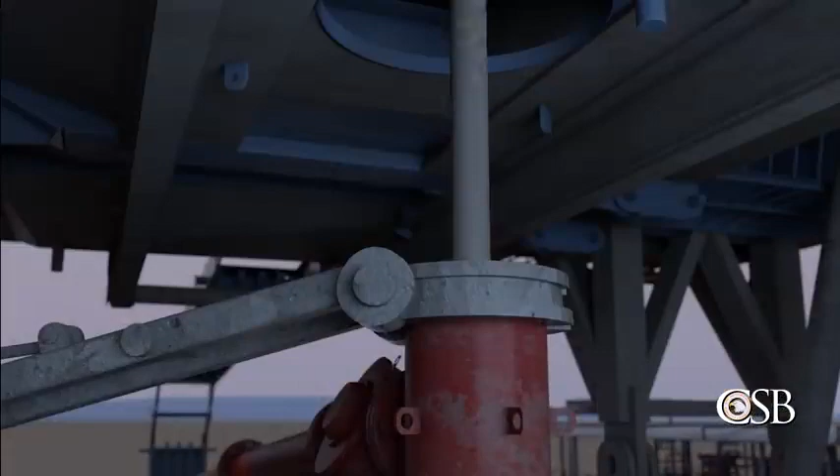January 22, 2018, the Pryor Trust gas well in Pittsburg County, Oklahoma. The well was operated by Red Mountain Operating, LLC, which contracted the Patterson-UTI Drilling Company to drill the well. In order to change a drill bit, crew members removed the drill pipe from the well. Approximately 3.5 hours later, a blowout and rig fire occurred, killing 5 workers.

Industry best practices recommend having 2 protective barriers in place at all times during drilling operations. But our investigation into the incident at the Pryor Trust well found that both of those barriers failed. The safety management system utilized at the well was simply not effective, and the result was a catastrophic blowout and fire.

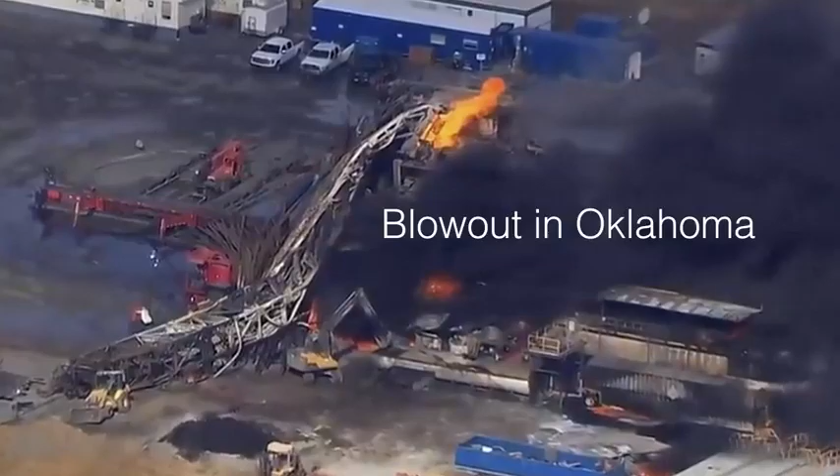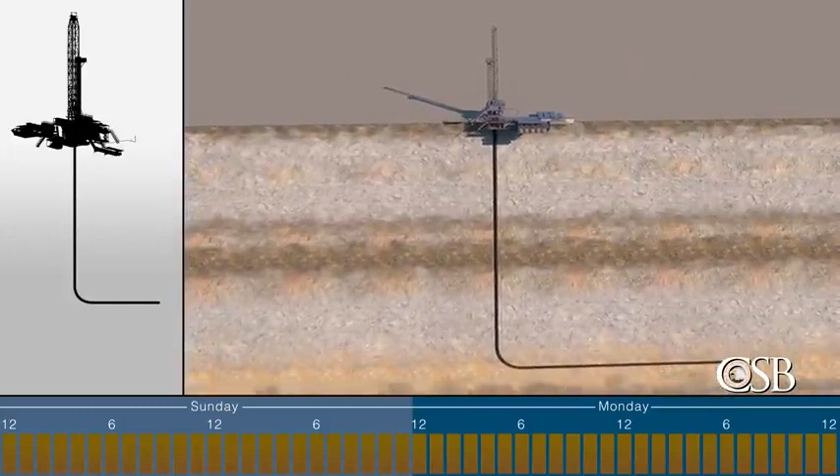The Pryor Trust gas well was comprised of vertical and horizontal sections being drilled to reach underground natural gas in the Woodford Geological Formation. During drilling, a diesel oil-based liquid called mud is pumped down through the drill pipe and back up through the area of the well outside of the drill pipe, called the annulus.

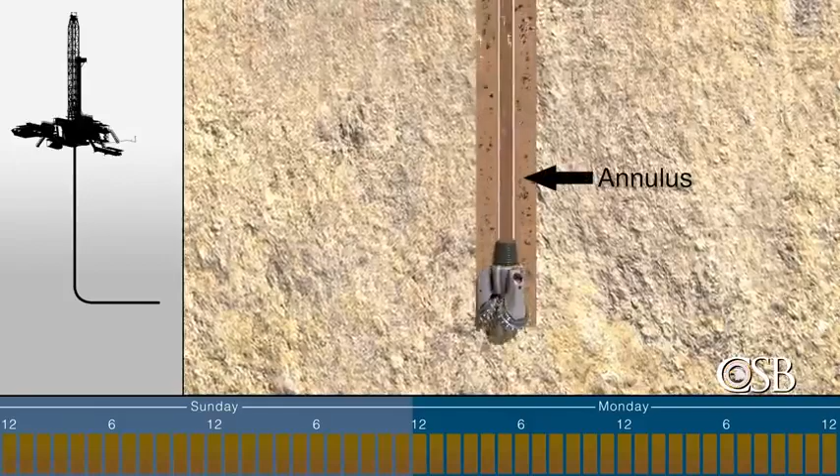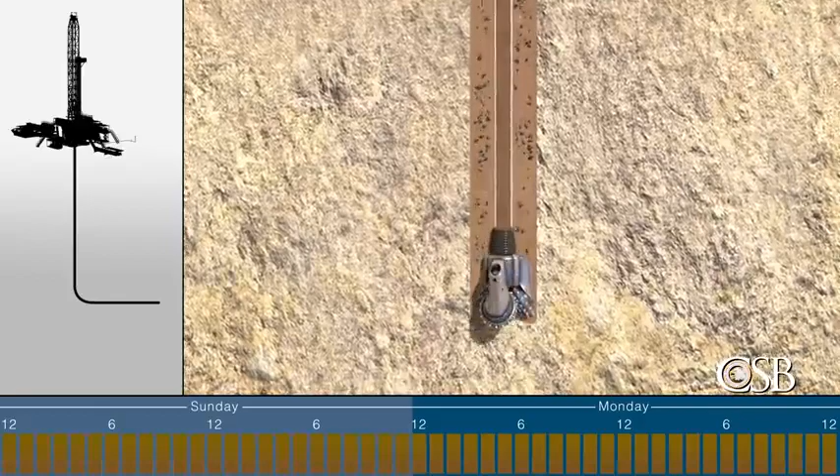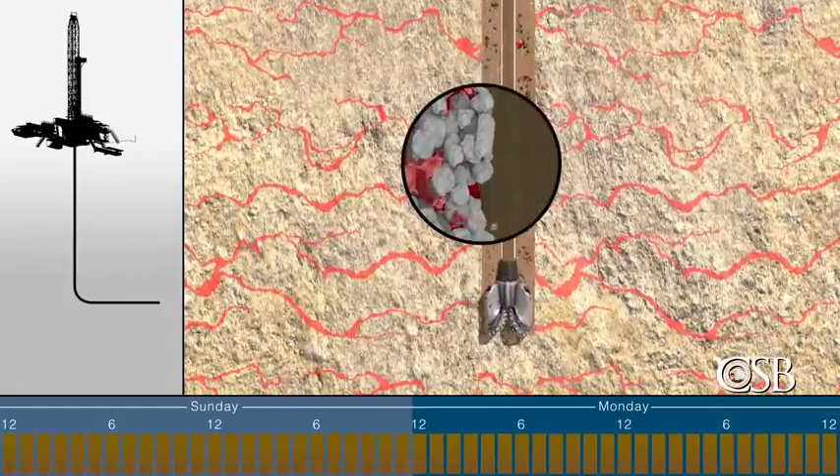When mud returns to the surface, it includes rock cuttings from the bottom of the well. Mud, however, has another important function. It is designed to add pressure to the well so that gas within the exposed geological formation is unable to enter the well during drilling. If that happens, and the gas is not detected, it can lead to a dangerous blowout.

On January 21, 2018, Patterson crew members had been drilling the well for 10 days under the supervision of 2 contracted representatives from Red Mountain. They were drilling the horizontal section of the well.

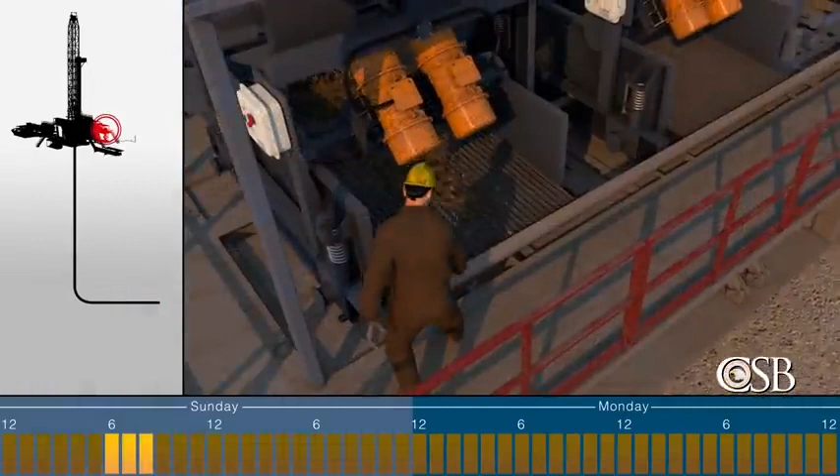That morning, a crew member called a mud logger studied the rocks returning to the surface and found they were different than expected. He believed the drill pipe had inadvertently entered a different geological formation where Red Mountain did not intend to drill. Shortly after, gas started to escape from mud returning to the surface.

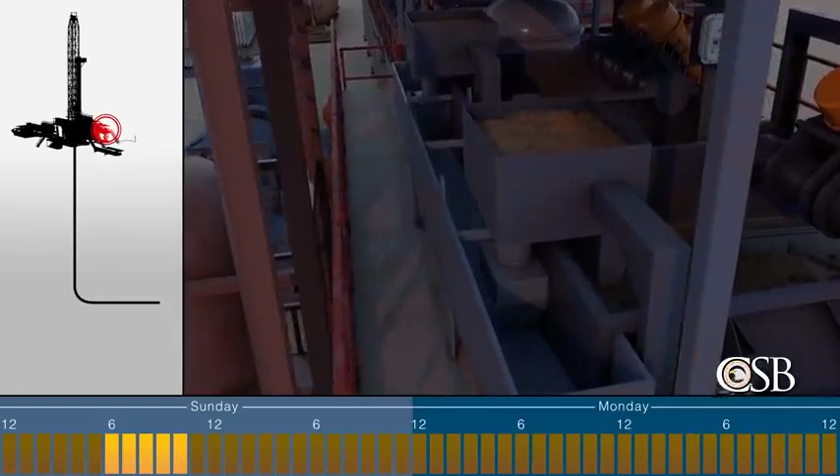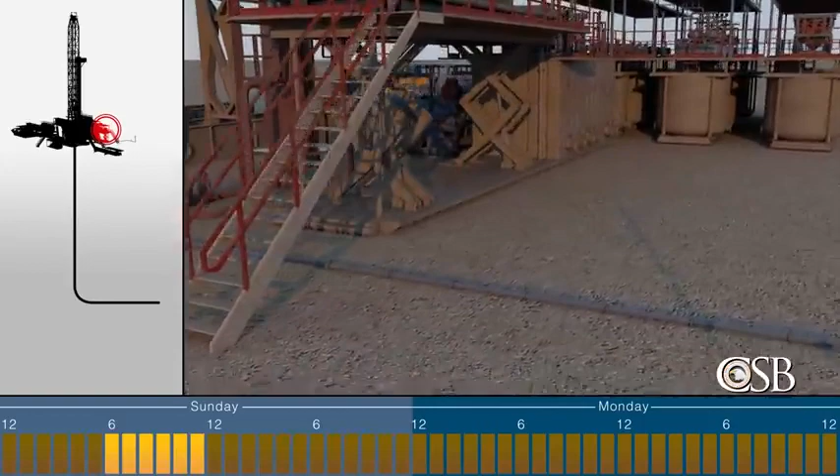The gas caused mud to spit out of equipment near the well and cover a portion of the rig. Around 11 a.m., the drilling crew adjusted piping so that mud returning from the well was routed to a piece of equipment called a mud gas separator that removed the gas from the mud. The separated gas was then routed to a flare to safely burn it.

The size of the flare indicated that there was a significant amount of gas in the mud and that the well had likely become underbalanced, meaning that pressure from the mud was not keeping gas out of the well as intended. The crew continued drilling underbalanced until 3:30 p.m., when they stopped because the drill bit had become worn and needed to be replaced.

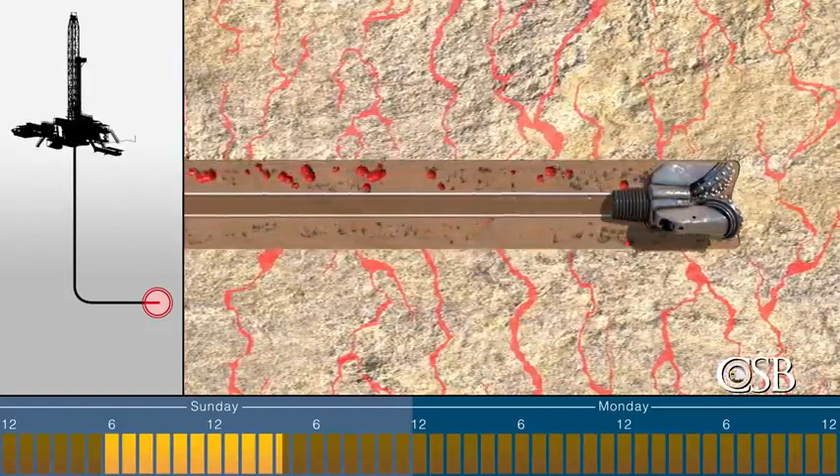The crew first circulated the well for 3 hours by pumping mud down the drill pipe and up the annulus. The flare continued while the well was circulating, an indication that the well remained underbalanced. While circulating, the Red Mountain representatives discussed how to remove the drill pipe from the well in order to replace the drill bit. The process to remove a drill pipe is called tripping.

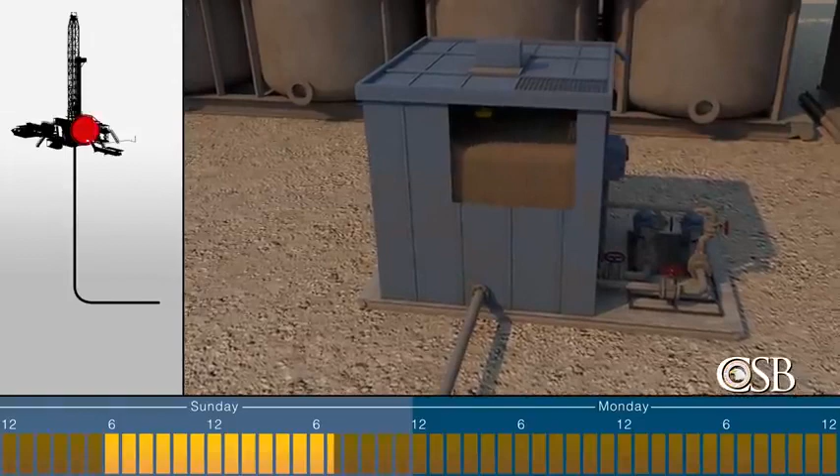During any tripping operation, mud is pumped into the well to replace the volume of drill pipe being removed, which prevents gas from flowing into the well. In this case, the Red Mountain representatives decided to use a tripping method called calculated fill, which involved periodically pumping a calculated amount of mud into the well as the drill pipe was removed. They believed this method would keep the well contained if gas entered during the operation.

But it was not a standard tripping method during normal drilling, so no one on the Patterson crew had performed it before, and they had no written procedure. The crew started removing the drill pipe at 6:47 p.m.

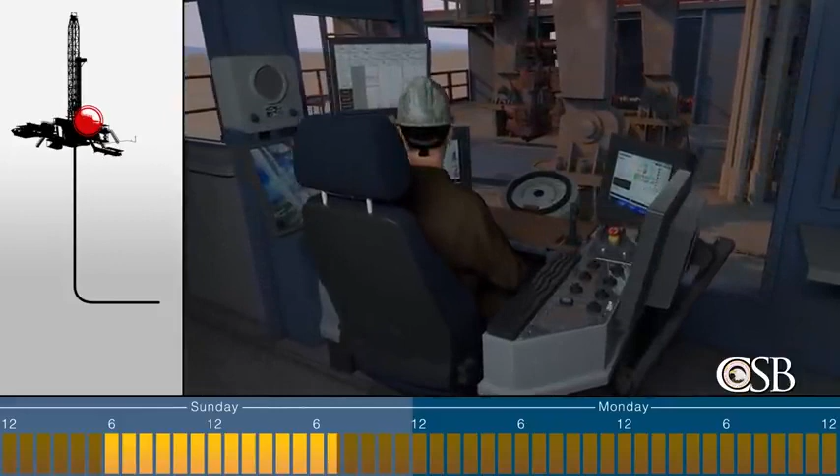The CSB found that while tripping the drill pipe from the horizontal section of the well, not enough mud was pumped and gas entered the well. The driller, who was controlling the operation from inside a building on the rig called the driller's cabin, did not see the discrepancy. That is because he had not been sufficiently trained on a new electronic version of a trip sheet, which is a form used to monitor and calculate whether a well is taking the proper amount of mud during tripping.

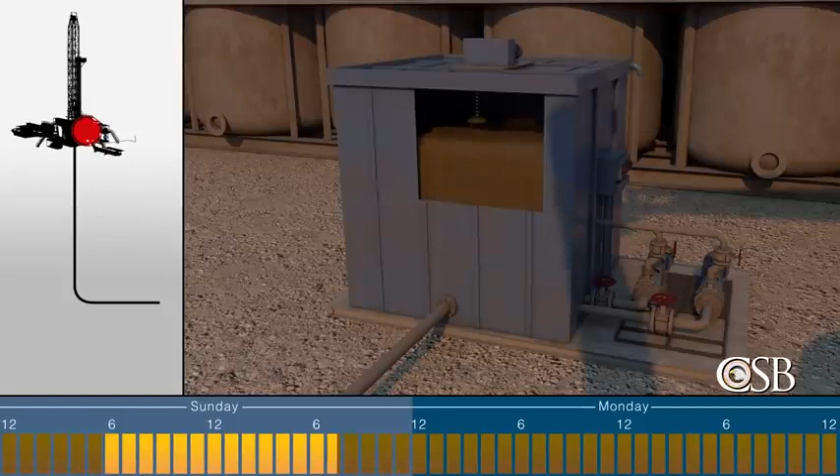As a result, he was unable to see that a significant amount of gas continued to enter or expand within the well, causing pressure to increase and mud to backflow into a surface tank called the trip tank. In fact, pressure at the surface had increased so much that the centrifugal pump the crew was using could no longer pump mud against the well's pressure. Red Mountain's representatives decided to switch to higher pressure mud pumps to try to force mud into the well, believing the pressure applied would push any gas out.

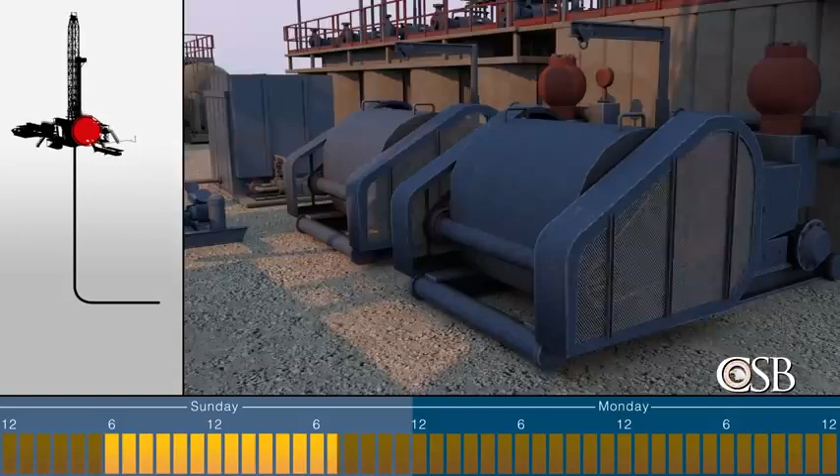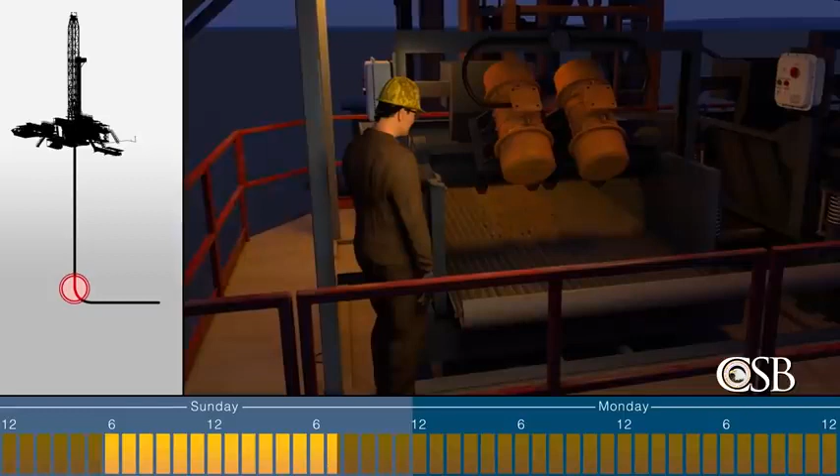But by the time the drill bit reached the top of the curve in the well, the CSB found that, unknown to drilling crew members, 20 barrels of gas had entered or expanded within the well. At that time, the drilling crew performed a 45-second flow check to see if gas was flowing in the well. The crew did not observe any flow and believed the well to be stable, but the CSB determined that the flow check was inadequate.

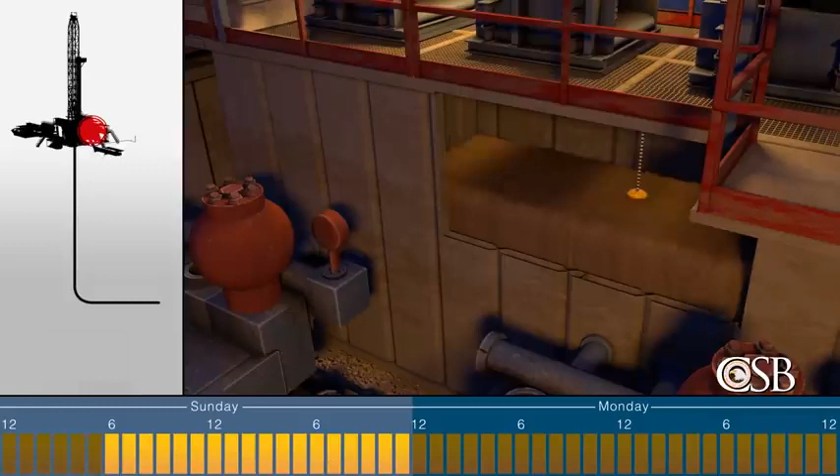At 11 p.m., the drilling crew again circulated the well. While circulating, the rig's mud pits, tanks used to hold mud at the surface and equipped with level sensors, gained 14 barrels of mud when they should have remained stable. This meant the well had gained approximately 14 barrels of gas, which caused mud to escape at the surface. But the night shift driller had turned off the alarm system before the tripping operation, so no alarm sounded and the large gain went unnoticed.

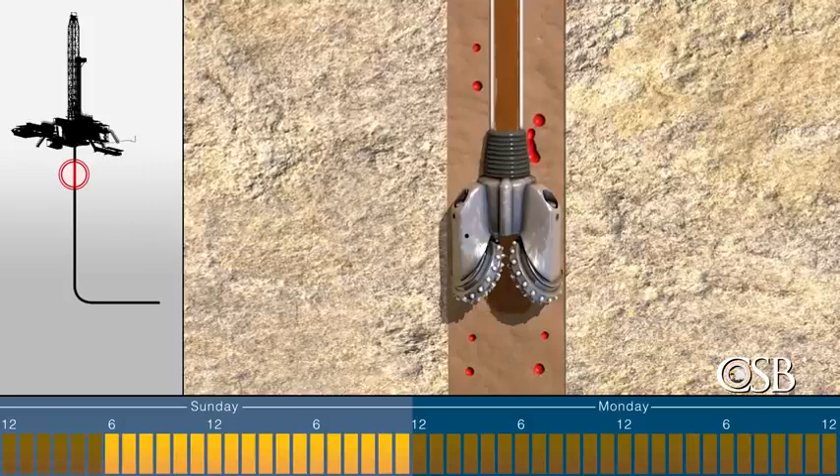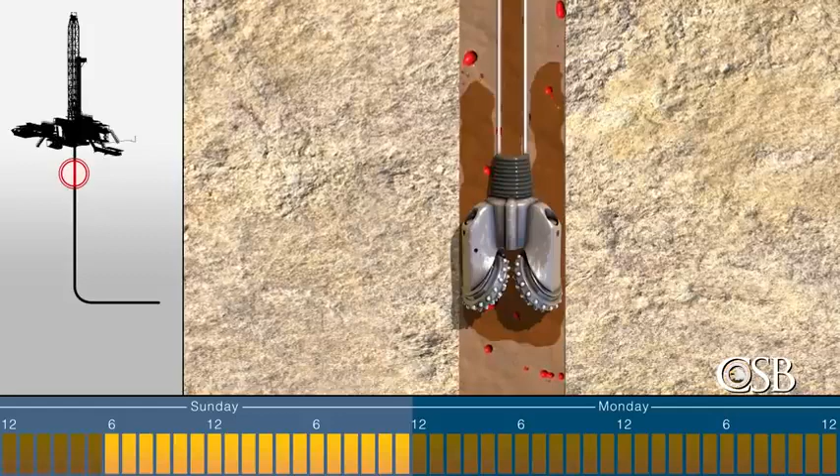Red Mountain's representatives then decided to pump a weighted volume of mud, called a pill, into the well to generate enough pressure to prevent gas from entering. But a Patterson drilling crew member misheard Red Mountain's instructions over the radio, and they accidentally added lost circulation material to the pill. This material is designed to clog breaches in the well and is not intended to be in weighted pills. Although the mistake was discovered, the pill containing the lost circulation material was pumped down to the bottom of the drill pipe, clogging it.

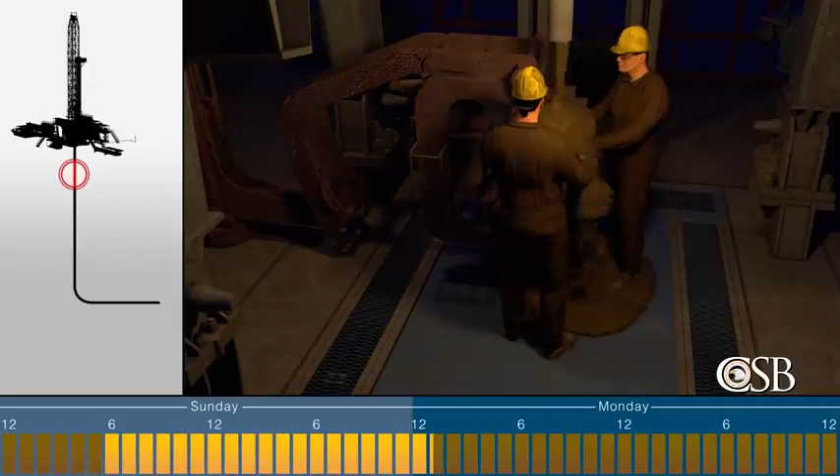By 1:12 a.m. on January 22nd, the crew started to remove the drill pipe from the vertical section of the well, using the typical industry tripping method called continuous fill, where mud is pumped continuously into the well as the drill pipe is removed. But because the drill pipe was clogged, the mud was not freely draining into the well. The crew attempted to pump a weighted slug of mud into the drill pipe to push the clogged mud out, but this was not successful.

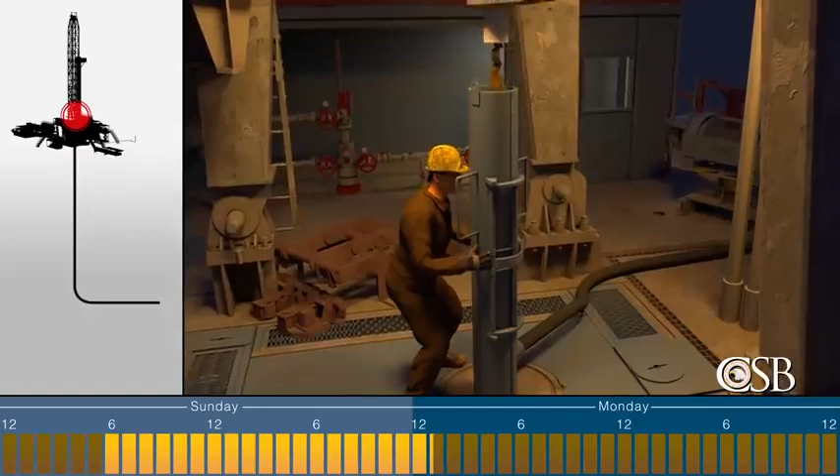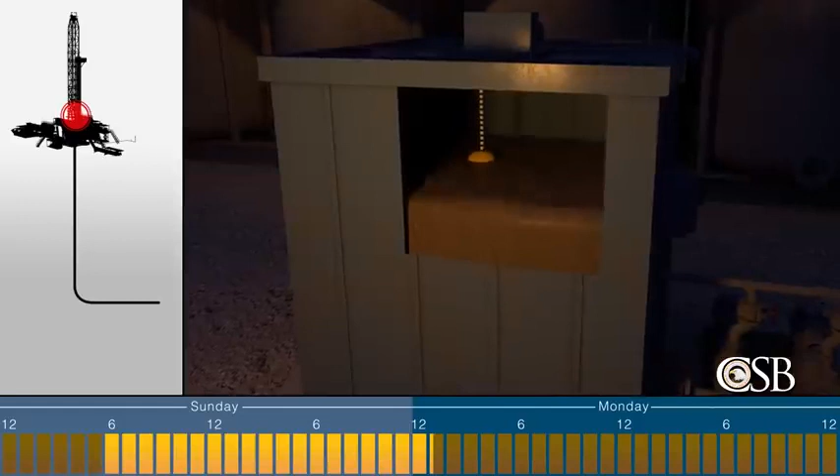With the drill pipe plugged, the drilling crew had to trip wet, meaning mud was in the pipe sections being removed at the surface. The crew used a mud bucket to collect mud from the drill pipe, draining it into the trip tank. But the trip tank was also used to pump mud into the well during tripping, so its volume started to fluctuate as mud was pumped out and drained in. The fluctuations confused crew members, who did not realize that while the drill pipe was being removed from the vertical section, the well gained another 23 barrels of gas.

When the bottom hole assembly, the equipment at the end of the drill pipe that includes the drill bit, was near the top of the well, the crew finally removed the plugged part of the drill pipe. For the next hour, they tried to clear the clog. But at that time, and during a subsequent shift change, the well was still flowing, gaining another 31 barrels of gas and pushing more mud into the trip tank. No one saw the gain.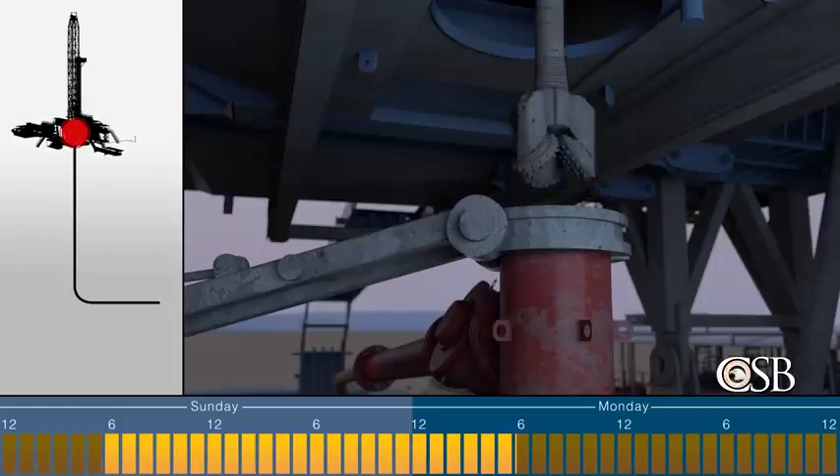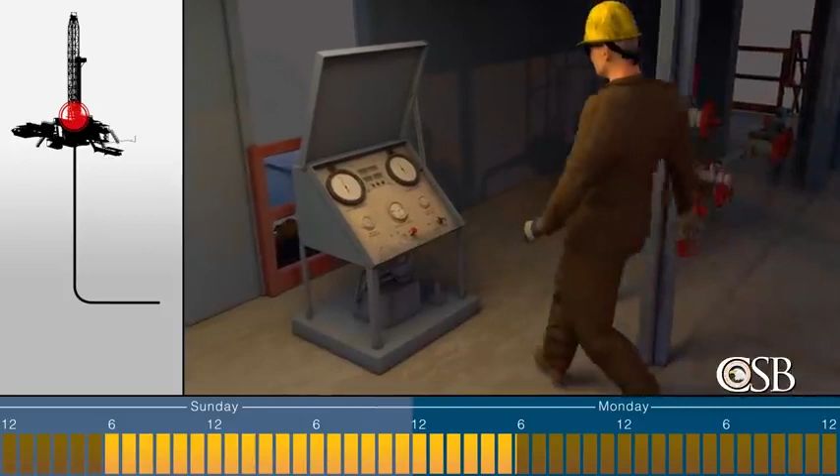At 6:10 a.m., the crew lifted the bottom hole assembly out of the well and closed the blind rams on the blowout preventer. They prepared a new bottom hole assembly for testing. When it was ready, a drilling crew member checked a pressure gauge on the rig floor to see if it showed pressure in the well, a safety precaution used before opening the blowout preventer. The pressure gauge showed no pressure.

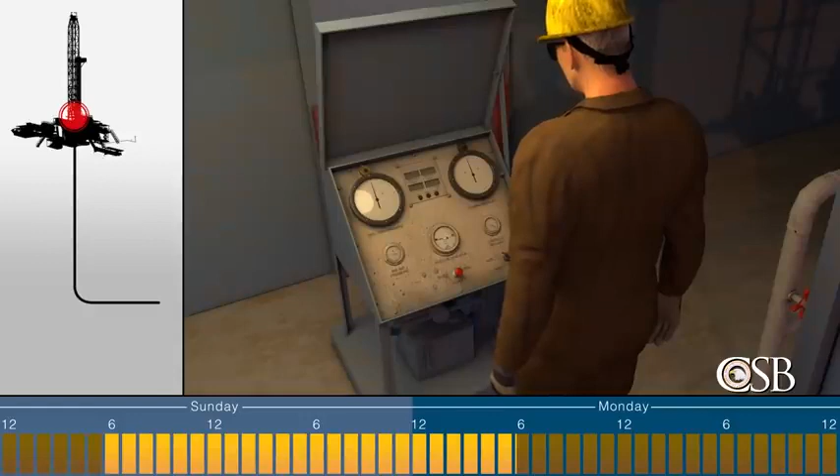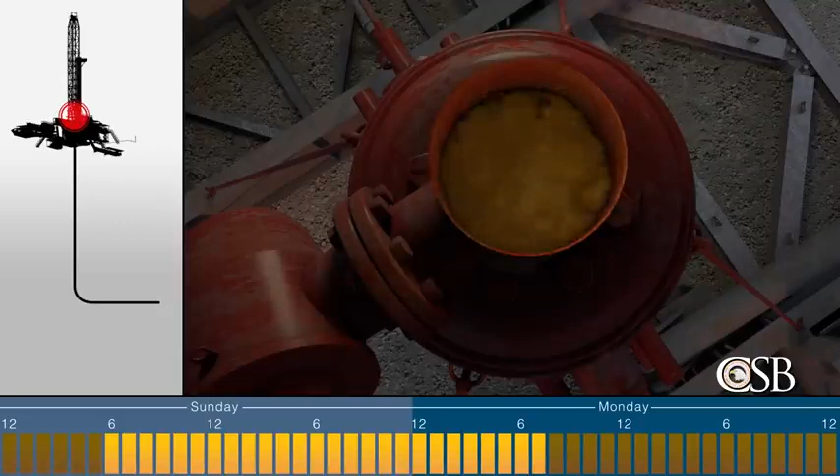But at 7:57 a.m., when the blind rams were reopened so the new bottom hole assembly could be lowered into the well, 5 barrels of mud surged to the mud pits. At that time, a crew member pulled away the steel plate covering the hole in the rig floor over the well. He waved over another worker who saw mud bubbling in the well, a sign that there was a significant amount of gas in the mud. That worker later told the CSB that he does not know if the mud bubbling was communicated to the driller.

Between 7:57 a.m. and 8:35 a.m., while the drilling crew was testing the new bottom hole assembly, the mud pits gained another 102 barrels of mud, a very large volume. This significant gain likely displayed on the driller's data screen, but the day shift driller also chose to turn off the alarm system, and it is unknown if the driller saw this dangerous gain.

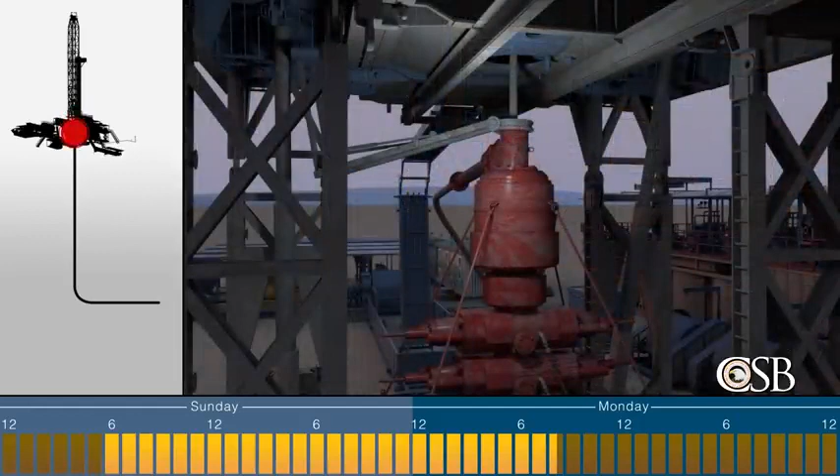At 8:35, with testing complete, the bottom hole assembly was removed from the well, and the mud pits gained another 12 barrels of mud, for a total influx of 207 barrels of gas into the well from the start of the tripping operation. A crew member saw mud flowing up out of the open blowout preventer stack.

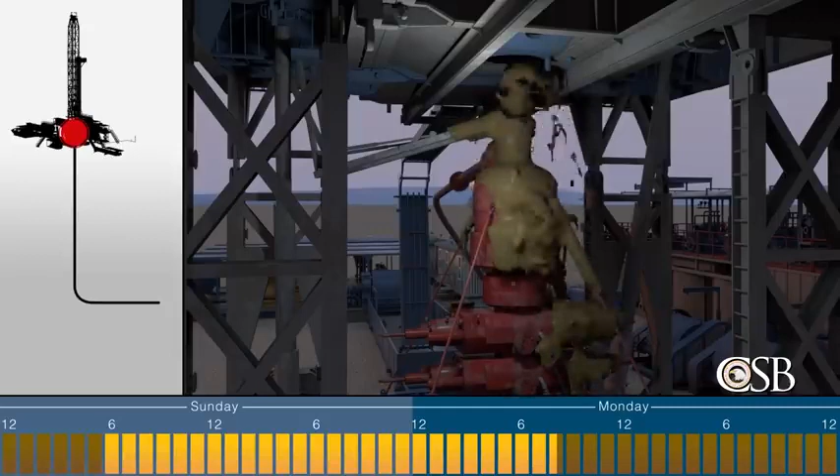The mud was shooting up steadily, getting closer to the rig floor. The crew member told the driller, and the driller responded that he was going to close the blind rams, but he never made it. Seconds later, mud blew upwards out of the well in what is known as a blowout.

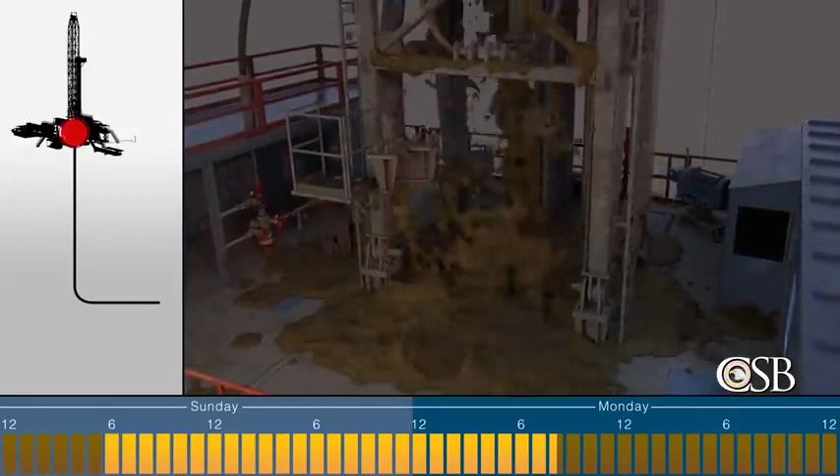2 workers on the rig floor ran into the driller's cabin, where 3 other workers were already located. The gas and mud then ignited, causing a massive fire. All 5 people in the driller's cabin were killed.

The blowout continued for hours until a well control services company was able to shut in the well around 4 p.m.

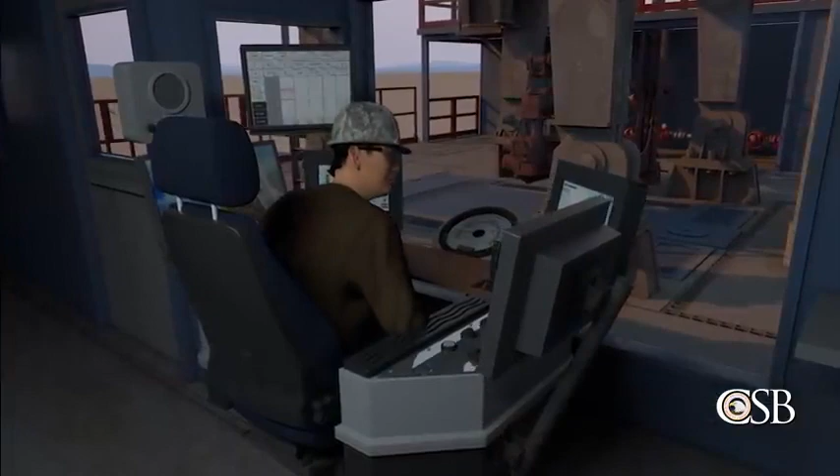During its investigation, the CSB found data indicating that on the evening prior to the blowout, the night shift driller turned off the entire alarm system. Data also indicates that the day shift driller briefly turned on the alarm system, but then quickly turned it off again on the day of the incident. Other than that short period, the alarm system was off for 14 hours, leading to the blowout.

We were not able to conclusively determine why the drillers turned the alarm system off. A possible reason is that the alarms were perceived as a nuisance or an annoyance. In fact, we found that had the alarm system been on, most of the alarms that would have activated during the 14 hours leading up to the incident likely would have been irrelevant to detecting the problems in the well.

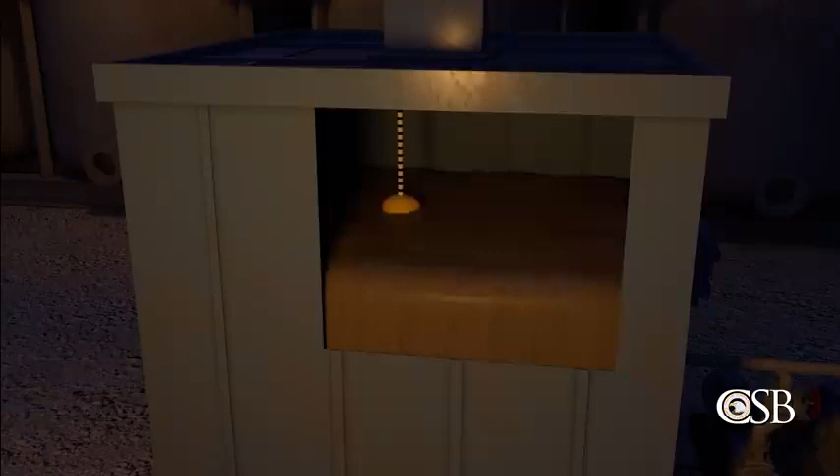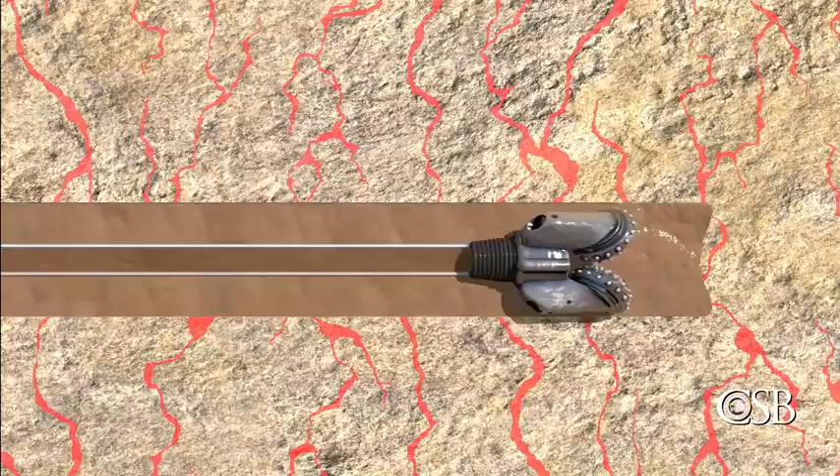For an alarm system to be effective, it must be configured so that the driller only receives alerts to conditions that require attention. But the CSB found that Patterson did not develop guidance to help drillers set the alarm system for the various operations performed on the rig, such as drilling, tripping, and circulating. Instead, to manage the alarm rate, both drillers apparently elected to simply turn off the alarm system.

We concluded that what's called a state-based alarm strategy is one way to solve this issue. For example, on a drilling rig, there could be different active alarms for each operation, such as drilling, tripping, and circulating, so that alarms critical to a certain operation do not become a nuisance when operating in a different state where those alarms are not needed.

Although there is a large body of guidance and recommendations on the design of alarm systems for hazardous operations, none are specifically targeted for the drilling industry. As a result, the CSB made a recommendation to the American Petroleum Institute to develop a standard on alarm management, specifically for the drilling industry, that addresses drilling's unique dynamic environment and provides guidance on implementing a state-based alarm system for different operating modes.

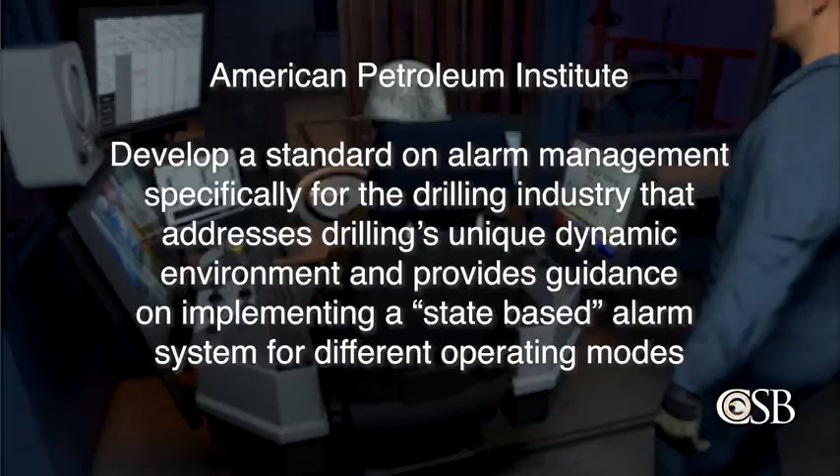When the blowout started, 2 crew members on the rig floor ran inside the driller's cabin. 3 other crew members were already in the driller's cabin, and all 5 workers were killed. It is unknown how long the victims remained alive inside the driller's cabin, but they had no viable escape routes.

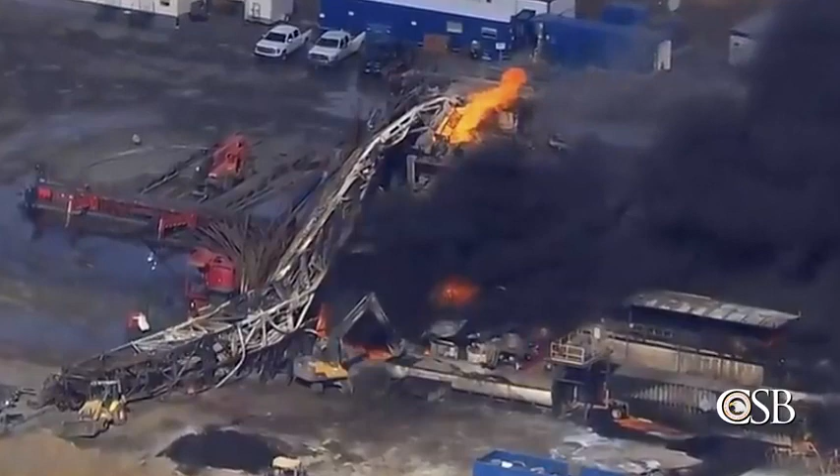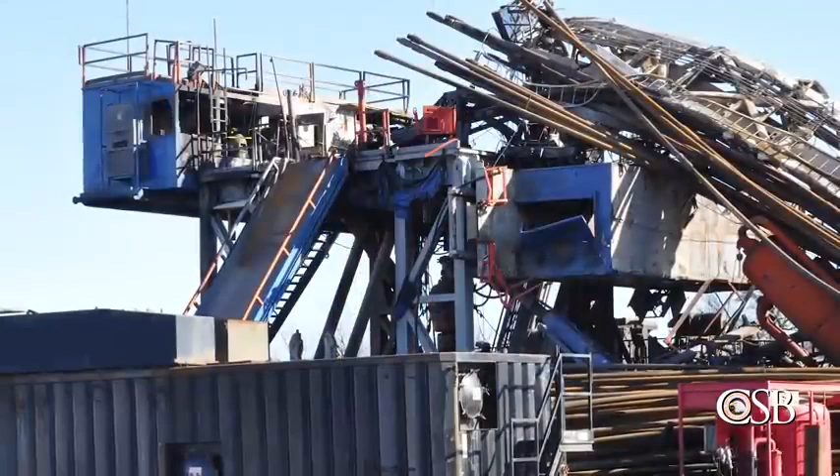There were 2 exit doors from the driller's cabin, but both of those exit doors were blocked by flames after the gas and mud ignited. The CSB concluded that had the fire rating of the driller's cabin been ensured for a minimum time, with emergency escape options from the floor or from the back wall, there could have been a better chance for the workers inside to have survived this incident.

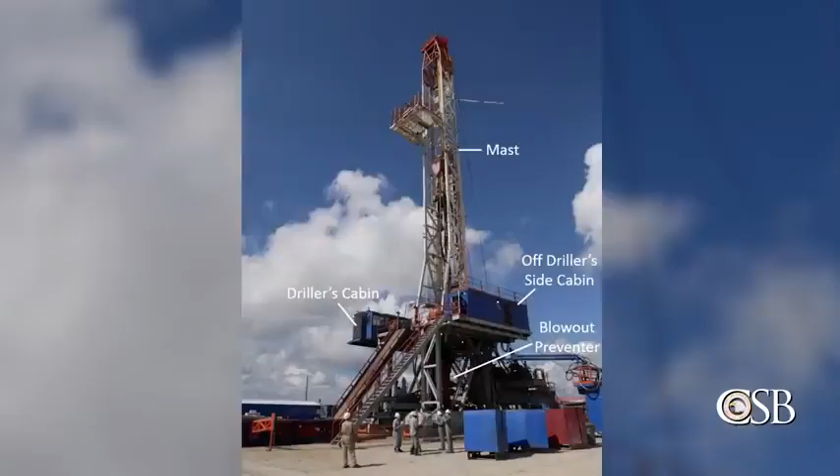Stan Christman is a drilling expert who consulted with the CSB on the Pryor Trust investigation. On a drilling rig, the operations are controlled from the driller's cabin by the key man, the driller. And he has a crew that works for him on the rig floor. The driller's cabin is located right next to the rig floor. He can see, talk over radio, even directly to the crew and get things done.

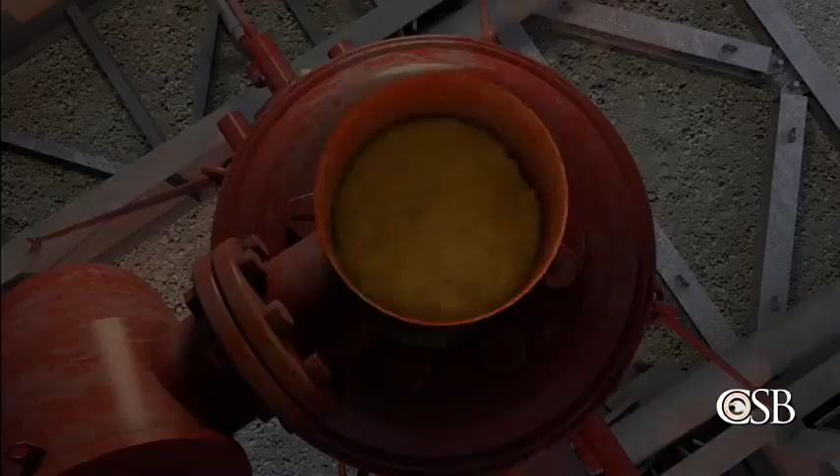Having the driller's cabin near the rig floor puts it closer to the hazards, and that is things happening on the floor, typically from the well. And these hazards are things that we could probably think further about.

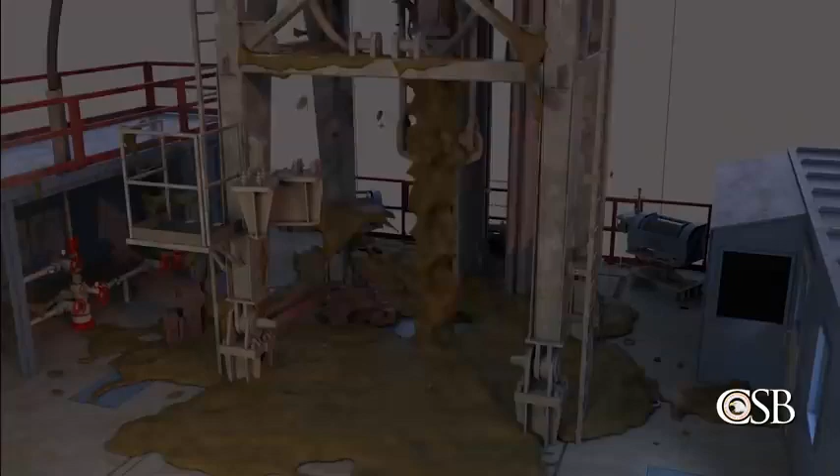Although there are best practices within the chemical industry for the location and design of control rooms, there is no guidance specific to drilling. As a result, the CSB made a recommendation to the American Petroleum Institute to develop guidance addressing the protection of onshore rig workers from fire and explosion hazards in the event of a blowout. The guidance will specifically address the design and location of the driller's cabin and establish minimum required evacuation methods from various locations on the rig.

Flow checks are a safety-critical operation used to determine if gas or other formation fluids have entered a well, which could lead to a blowout. Patterson policies required flow checks to be performed at various times during the tripping operation. But the CSB found that of the 27 flow checks that were required by Patterson during the drilling of this well and the previous well, only 2 were performed, and those were inadequate.

There was a culture on this rig that accepted the non-performance of flow checks. Performing flow checks during the tripping operation, as required by Patterson, could have identified that the well was flowing and could have prevented the blowout.

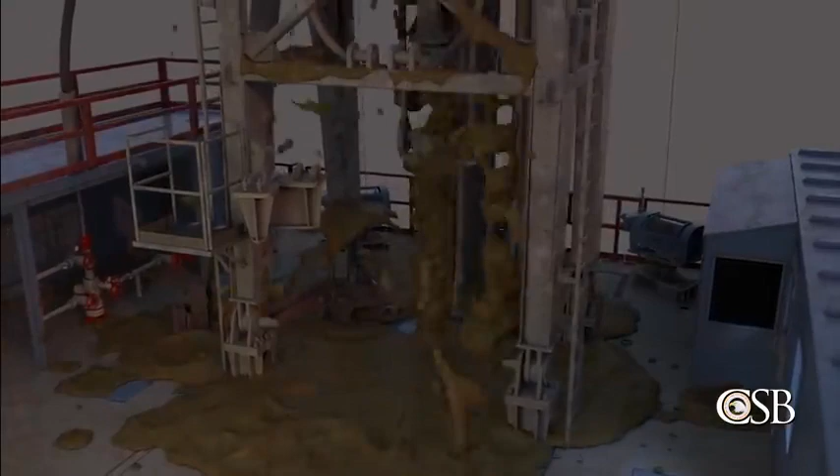The CSB found that the cause of the blowout and rig fire was the failure of both barriers that should have been in place during the operations leading to the blowout. Those two barriers were the primary prevention barrier, hydrostatic pressure produced by drilling mud, and the secondary mitigation barrier, human detection of gas entering the well and activation of the blowout preventer.

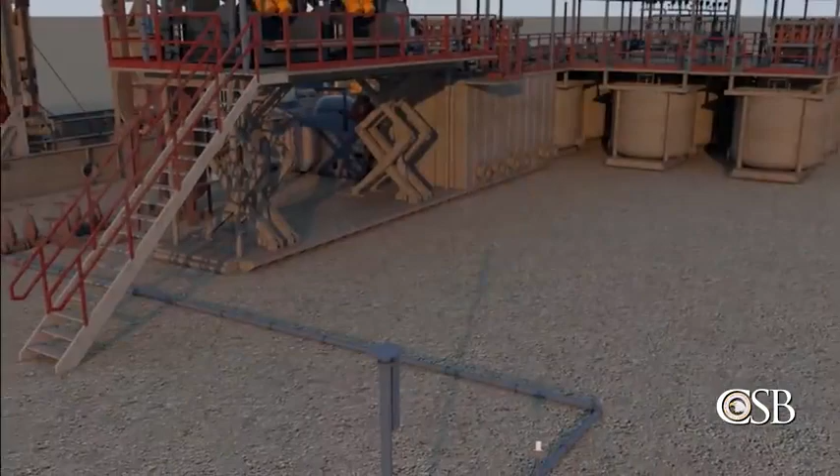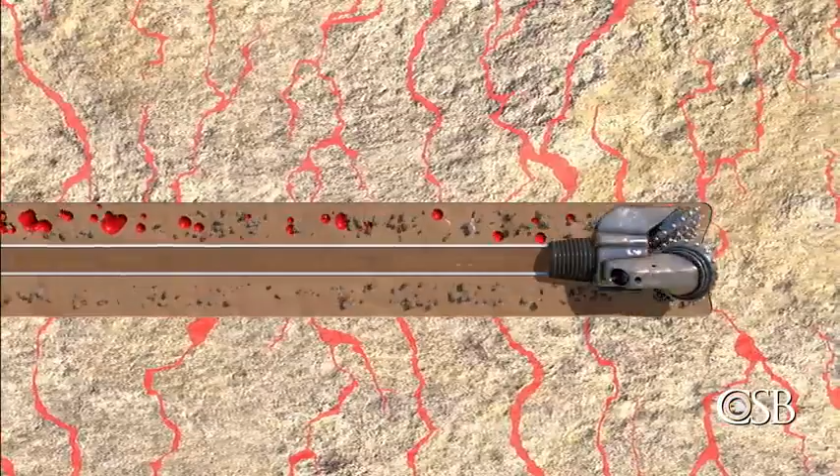When the well became underbalanced on January 21st, the primary protective barrier was lost, but work was not stopped so that the barrier could be reestablished by increasing the weight of mud, and no analysis on the loss of the barrier was performed. We learned that Red Mountain had developed what they called a drilling prognosis, which is a type of well plan.

But that plan did not specify what barriers were required or how to identify if a barrier was lost. And we found that development of a more comprehensive plan, such as what's known as the Well Construction Interface Document, which is used more widely in offshore drilling, was not required.

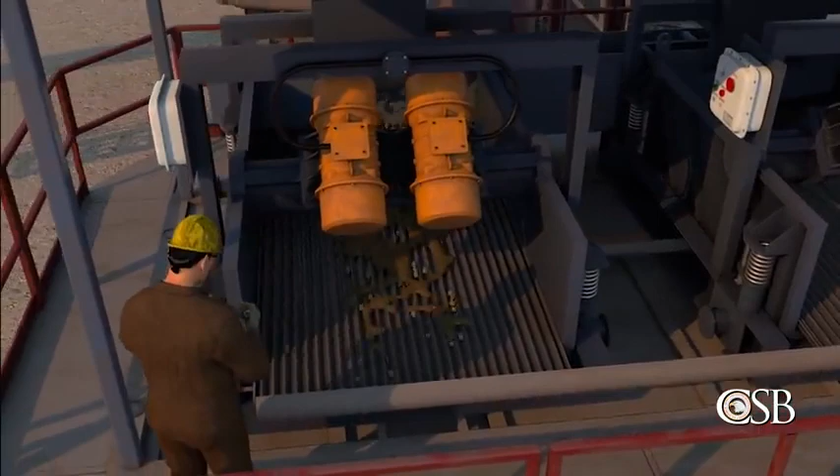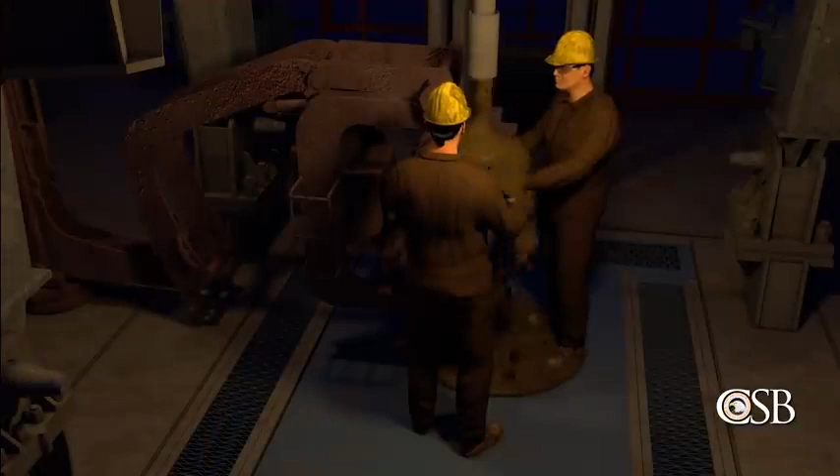In fact, there are minimal federal regulations governing the safety of onshore oil and gas drilling operations. The Occupational Safety and Health Administration's Process Safety Management, or PSM standard, which would require a hazard analysis of the operation, does not apply to drilling. No other OSHA standard specifically covers drilling, and no other federal regulatory body oversees the safety of onshore drilling operations.

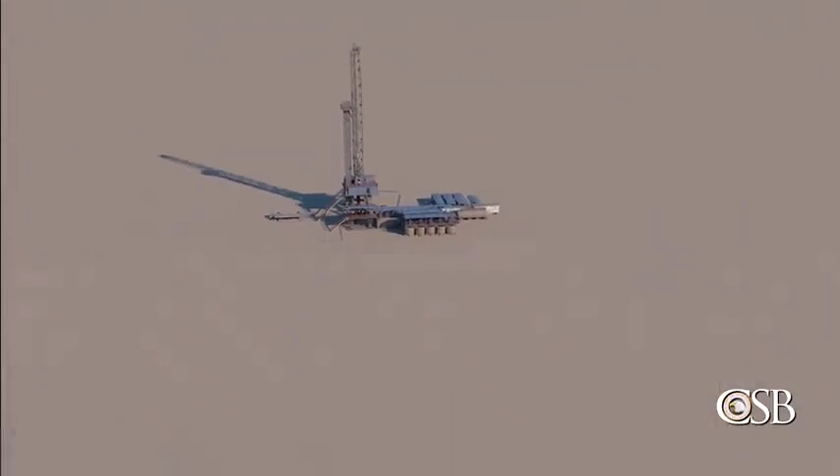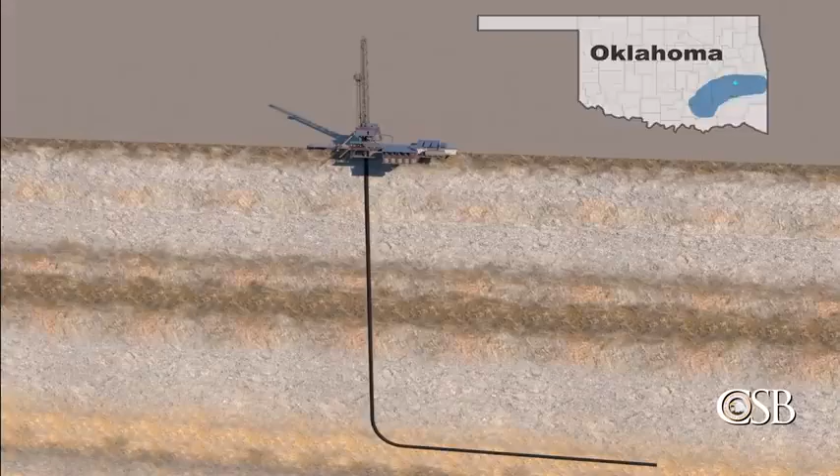With no federal safety standards for oil and gas, drilling companies are governed by a patchwork of individual state laws. During its investigation, the CSB determined that the laws in Oklahoma, where the incident occurred, are not focused on safety, and instead stress maximizing production and eliminating the loss of hydrocarbons.

The CSB believes more focused and specialized regulatory coverage, like the OSHA PSM standard for the chemical industry, is needed to better control the hazards inherent to drilling. With the requirement for a more effective safety management system, drilling companies can avoid incidents in a proactive manner, protecting both their workers and the environment.

As a result, the CSB made recommendations to OSHA to either apply the PSM standard to drilling of oil and gas wells or develop a new standard with a safety management system framework similar to PSM that applies only to the drilling of onshore oil and gas wells.

To prevent similar blowouts, drilling contractors and operators should develop a well construction interface document, bridging the operators and drilling contractors' safety systems and providing a barrier plan, including how to monitor barriers and how to respond if a barrier is compromised. Create procedures for operations, including tripping.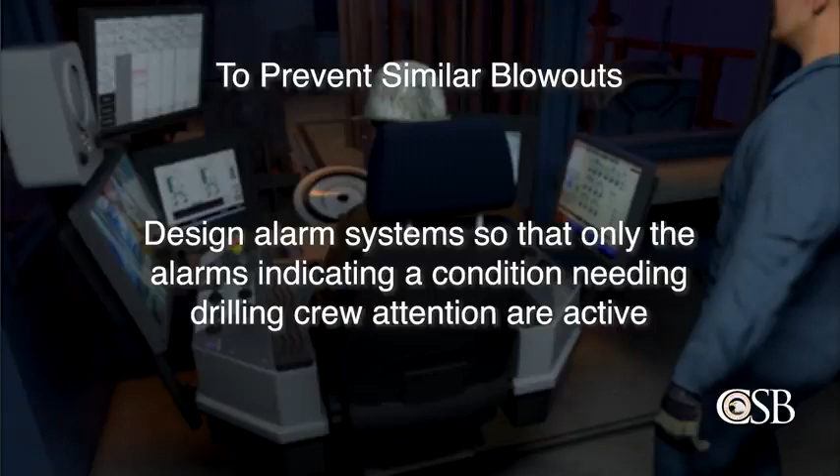Design alarm systems so that only the alarms indicating a condition needing drilling crew attention are active. Regularly perform drills to test drilling crews' abilities to detect and respond to signs of influx, and implement an indicators program to monitor and improve policy implementation rates.

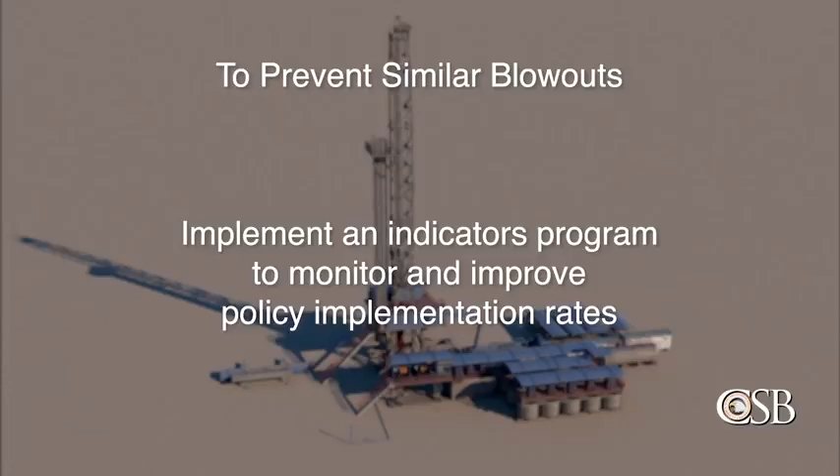The blowout and massive fire at the Pryor Trust well was completely preventable. We hope our findings and recommendations are used by the drilling industry to promote safer operations so that similar tragic incidents can be prevented. Thank you for watching this CSB Safety video.